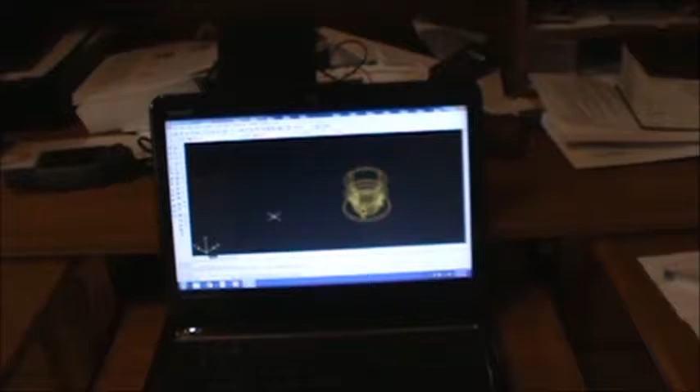This is the part I'm making. It's for the go-karts—we need a little flange bracket, whatever you want to call it, to get an air cleaner on this thing. It's a snowmobile, and in the winter there ain't a whole lot of dust flying around, so they don't have any easy way to mount an air cleaner on them. So this is the piece I'm making to do that job.

We got her all drawn up here. Let me get her centered up a little bit for you, and a little bigger.

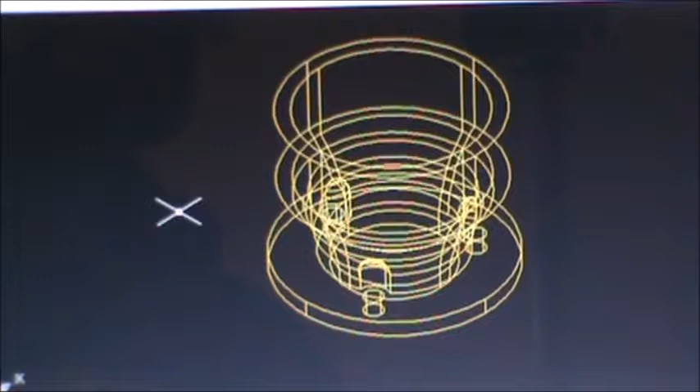Now I'm going to do something that makes me laugh every time, because these CAD guys always want to show you how they can spin their little part around. Man, I ain't impressed by you spinning that part around—what impresses me is how you made the drawing. But because that's what we like to do, we're going to spin her around a little bit for you.

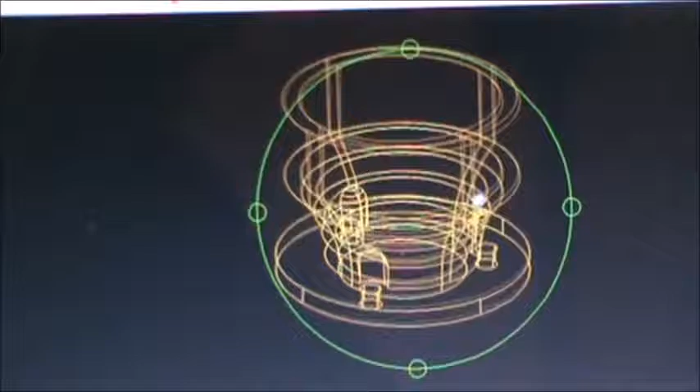That's the bottom of it right there that mounts on the carburetor, and this side up here is where we'll put a gear clamp, more than likely, with a foam filter around it. Let's see if I can get it rolled right over here for you—there you go, you can see right through it. Three holes for the screws that hold her all together.

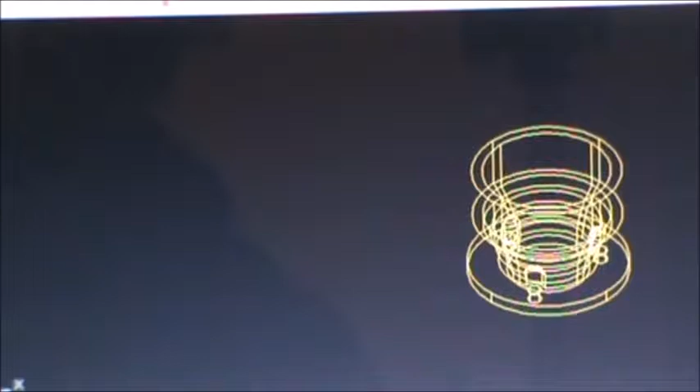And now, what it takes to get there. Let me get this straightened back around where it belongs—there's no confusion when I go to reopen it, because let me tell you, there's a lot of room for confusion with this stuff. Okay, so let's close this one down, and we'll open one—no, we don't want to save any changes—that'll give you an idea of what it takes to get to that point.

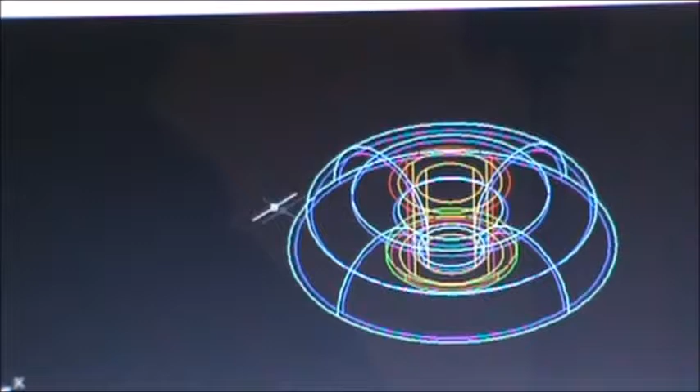This one might be it—oh yeah, this is the one. So here's the beginning stages of what it took for me to actually make that thing. And once again, we're going to play the old spin game—say this, whatever—orbit, we're going to orbit this thing. And you can see here's my...

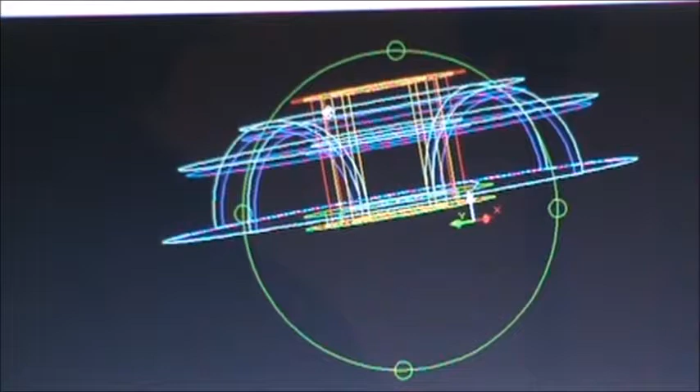...radiuses for part of it. These parts up here make the area to clamp the filter onto, and the flange is down here. Okay, that pretty much covers it—let me spin that around a little more, because some boys really think that's cool when they can do that. And that's cool, ain't it?

Okay, enough of that. We'll close this down, and now we'll head on over to the 3D printer in a second—no, we don't want to save any changes. We've been playing with that. We'll shut that down. So here's a couple of the finished parts.

Camera don't want to focus for some reason. Here's my first one, and as you can see, it doesn't have a hole through it—that'd make it a little hard for that carburetor to get air through it with no hole in it. So we moved on to the next one, and we got a hole in her. We actually got a shell, and it came out pretty good.

We're printing this at half size right now—no sense blowing away a bunch of filament plastic wire, which is relatively cheap, but this thing took over an hour to print, so the full-size version probably won't take that much longer, but we're going to find out. We're lacking the screw holes—I put them in, boy, that was a chore. They wound up poking through into the middle, and man, what a hassle that was. But we got her, and we're in the process of printing the first prototype with screw holes in it. We'll get a look at that here in a minute—the printer's over there running.

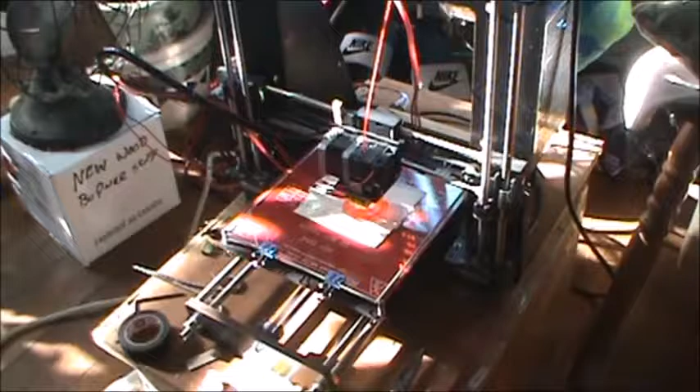Okay, this is what I like to refer to as my printing studio. Pretty high tech, but anyway, let's zero in on this a little bit, kind of get an idea of what's going on.

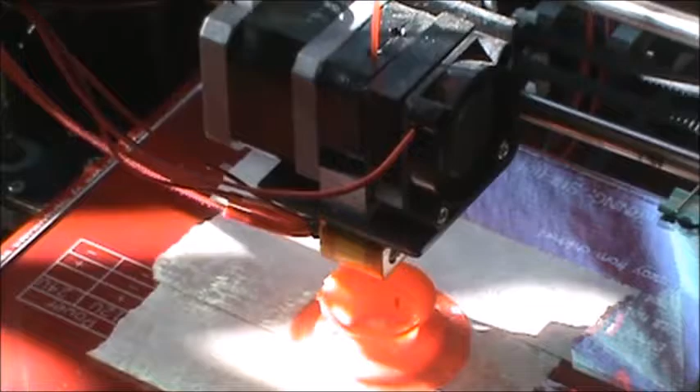And there she is, just a printing away. Looks like we're having a little trouble. I might have to turn that temperature down some. Oh yeah, she's definitely getting too hot. We gotta turn that down real quick.

That nozzle temperature turned down. We were running about 200 degrees Celsius. I backed her down to about, that's 189. I was shooting for 190.

So well, there's our beginning of our little 3D printing experience. And as soon as this one gets done, we'll fire up the old camera and give you a shot of what she looks like. Alrighty.

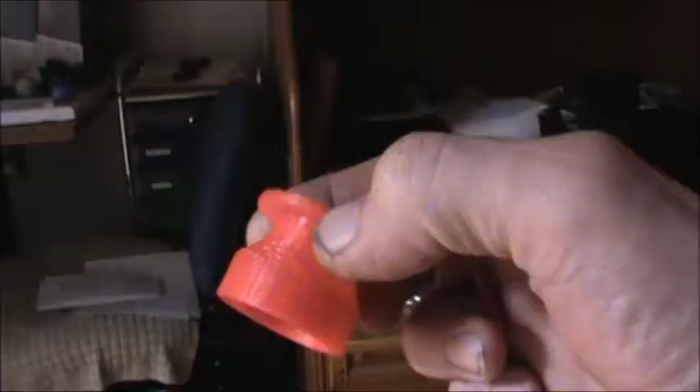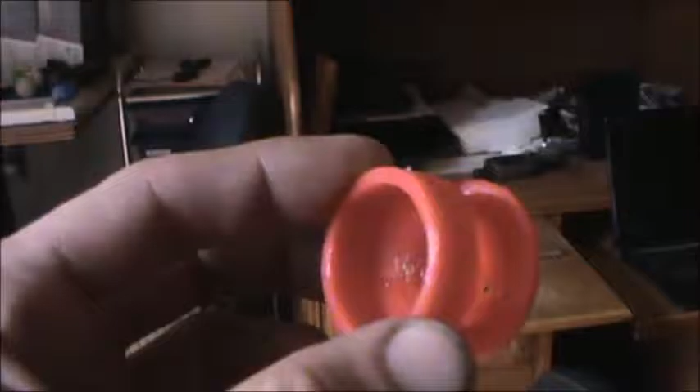And here's that finished product. Definitely not perfect. We got a couple holes - we got a hole right there. It's gonna let some dirt in. We can't have that. It's where I made the clearance for the heads on my screws that hold this thing to the carb.

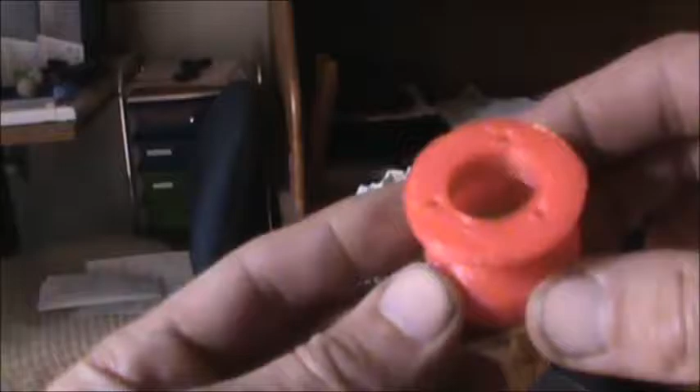I'm in the process of printing out a full size one now. This is actually half size right here. No sense wasting a bunch of filament on something you're not sure about. I'm doing it anyways though, because I didn't do nothing about them. I'm kind of hoping that when we go to full size that won't be an issue.

But yeah, there's a side that mounts to the carburetor, and we're going to clamp our foam filter on that side, and hey, we got a filter for the go-kart. The old dependable will finally have a real live filter.

Alrighty, in regards to how did that turn out - the good, the bad, and the ugly. Old Cheap Charlie here, he's going to use every last drop of this filament that they sent me with my printer, and then it kind of caused a little problem for me.

Let me show you the part that printed off. Oh, and by the way, I said something about that might just take a little longer than an hour. Boy, yeah, it took a little longer - 3 hours and some odd minutes, 3 hours and 12 minutes, I think, to print this whole thing off up to full size. But here's what I run into.

See, I was running along with the white - that's the base, so we started with the white, and when it ran out of the white, I stuck the red filament right in behind it and chased it down pretty good. Everything went really smooth, but when I went from the red to the green, I had a few hiccups there.

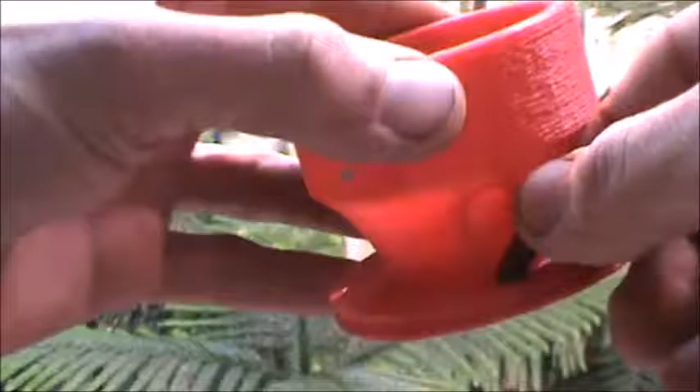Here's the final product. Man, it only had one little spot where my screws didn't want to go in. As you can see, we can get them slipped right in there. Drop right through - all three of them with no problem.

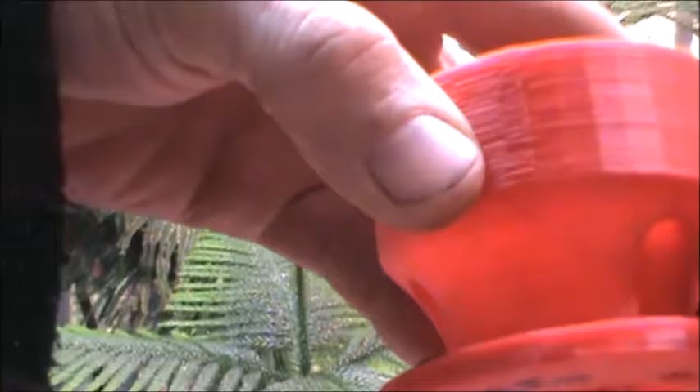Well, I had a little trouble with one. Had to get out the Dremel and open her up a little bit. But other than that, man, things look good. We'll take her over and bolt her onto the motor and put the filter on it and show you exactly what this thing's all about.

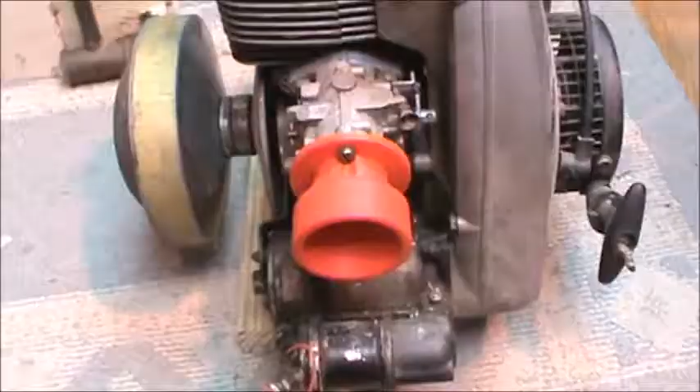Here's what she looks like on the snowmobile motor. Well, Dependable's really going to like this. I think it's going to be able to breathe some air that ain't 130% dirt. But that's what all the fuss has been about.

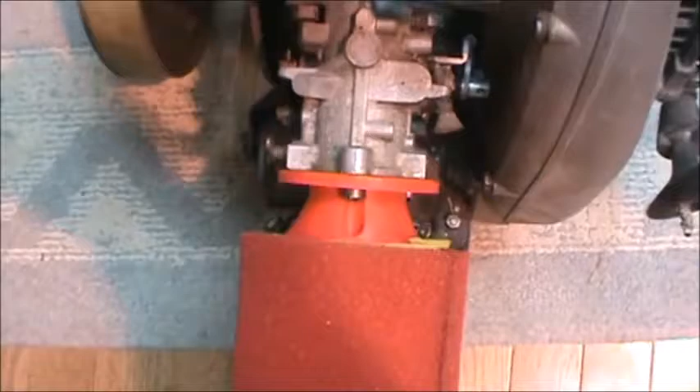And then we just take our foam air cleaner, and that fits neatly right on there. We will probably put like a gear clamp or something around that to hold the foam on, but looks like it's going to work.

Had to elongate my holes ever so slightly. Yeah, this is my bolt hole circle there. Not hard to do - I don't know how I did, though. It looked like it was a pretty nice even number, but I don't know.

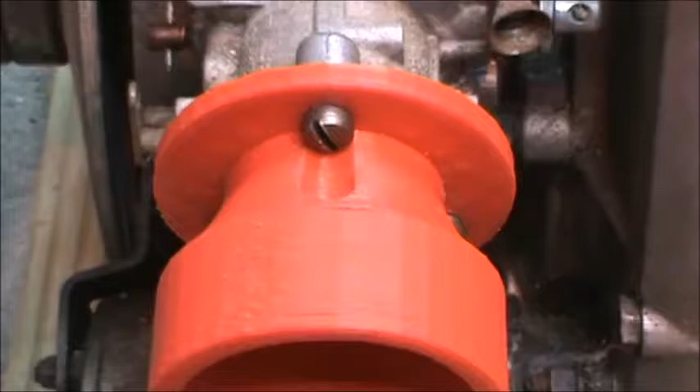Either way, it's on there now, and I torqued them screws down pretty good. I'd run it right where it's at, and I didn't hear no popping or cracking from the plastic, so I got to believe we're going to be plenty strong enough.

Time-wise, that print right there took 5 hours and 5 minutes - a little higher resolution than some of the other stuff that I printed. Used 13 meters of filament. What is that? 13 times 3, 39 - figure 40 feet of the old filament into it. But I think I gotta believe we're gonna call this one a success. I might move that bolt hole circle out ever so slightly, but man, she looks good. I like it. I'm happy.